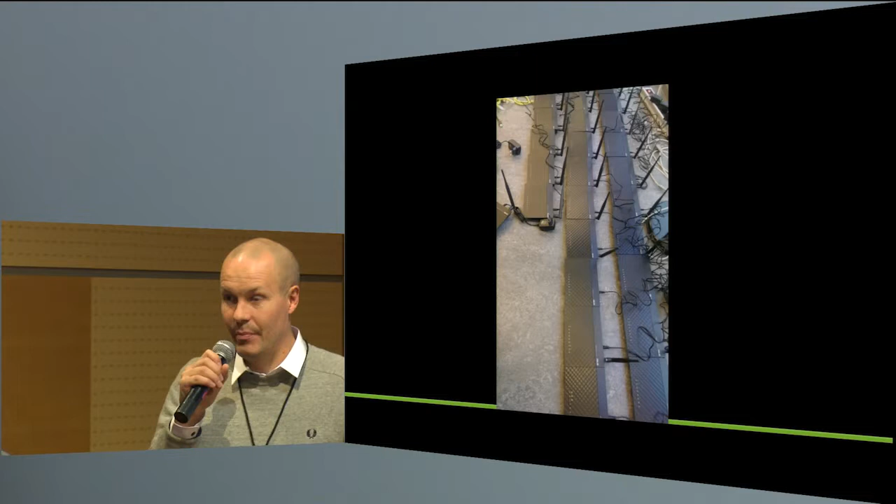The first problem is this. This is the most obvious one, and our planner is also at times guilty of this: AP overpopulation, right? Which leads to this. So even the best of planners tend to cause a lot of CCI by overpopulating the environment.

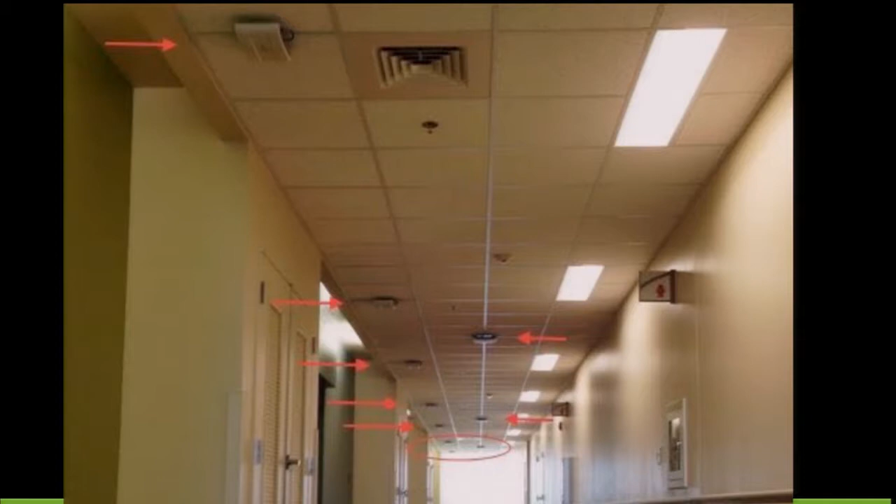And then there's another problem, right? Hallway Wi-Fi. So the planner doesn't understand where the hallways are, so it just places APs there. For some reason, they try to prefer the hallways quite often, which leads into enormous CCI.

And then this is very much a manual effort: disabling 2.4 radios. Certainly, I don't know of any auto planner that would do this today. And then they don't do really dual 5 gigahertz either. We support manually adjusting for dual 5 in ESS, and we support manually disabling the 2.4 radios, but the auto planner doesn't do that.

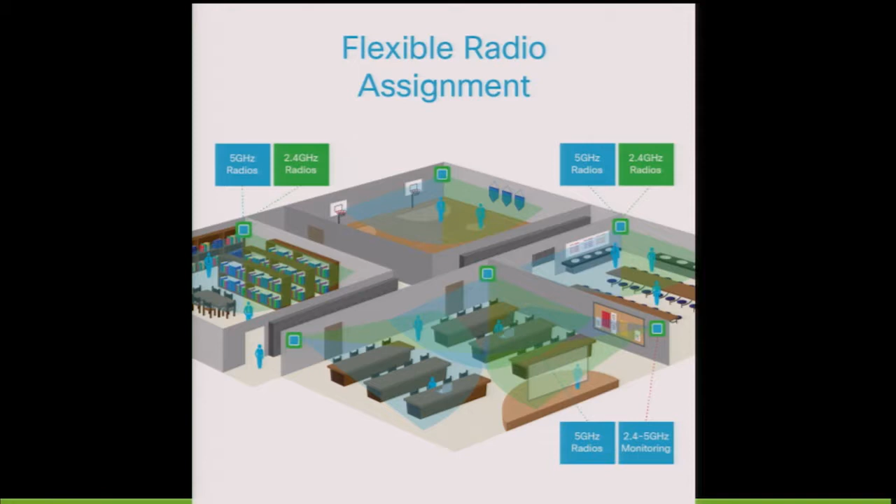So, this is probably the biggest problem with our current planner. It doesn't distinguish high density areas versus lower density areas. You can put in the amount of required capacity, but it just goes throughout the building. There's only one set of devices that you can put in per project, and it divides them evenly across the floors and across the areas.

So to summarize, that's that. Also, there's work to do on the ease of use of the planners as well. So what are we doing about it?

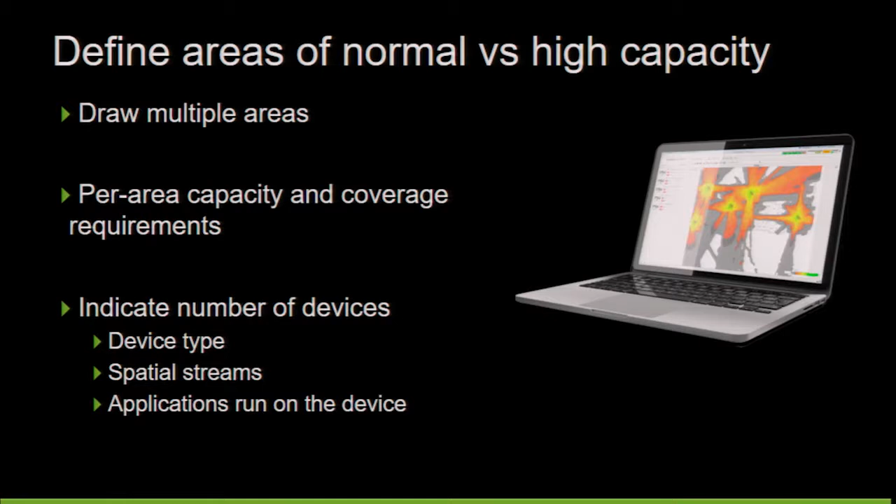In ESS 9, we will give you the ability to define high capacity areas, and this is pretty straightforward. You draw different areas, put in how many devices, put in also the coverage requirement like voice or data or whatever. And of course you can go deeper into indicating device types and applications run on the devices and spatial streams and stuff.

We also completely rewrote the AP placement algorithm. Most importantly, it avoids AP overpopulation. So if there's no spectrum reuse available, if spectrum reuse is just not there, it doesn't try to solve the problem by adding more and more APs.

That's probably, and thank you Keith, much appreciated. That's probably the biggest problem with the current planner, is just not understanding when to stop. It's the same problem as the sales guy has, right? And once Ekahau is bought by Cisco, then we'll bring back the feature of overpopulation. No, I'm kidding.

Also, we wanted to make the auto planner smarter. So it now avoids hallway Wi-Fi automatically. It tries to understand where the hallways are, using technology similar to what the wall outlining wizard does for wall simplification, but in a different way. It tries to identify where the hallways are, where the small rooms like restrooms are, where the elevator shafts are, and then it tries to avoid those locations the best it can. Sometimes it's just not feasible, but most of the time it does that.

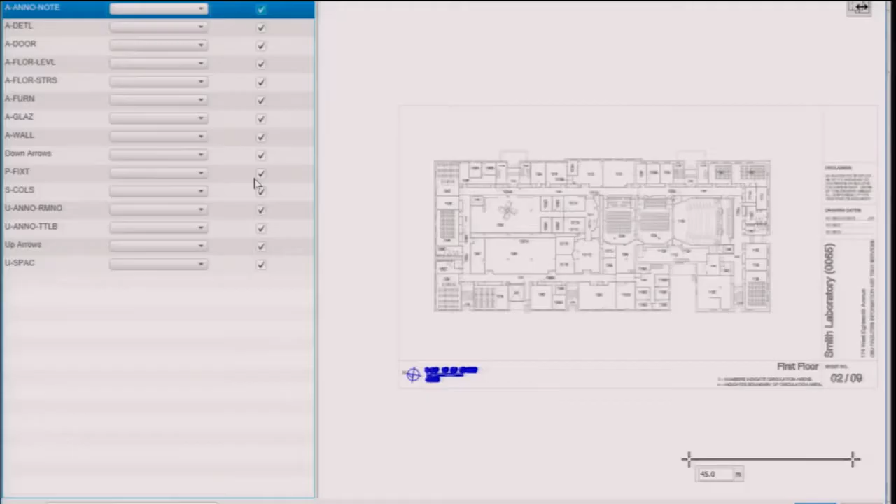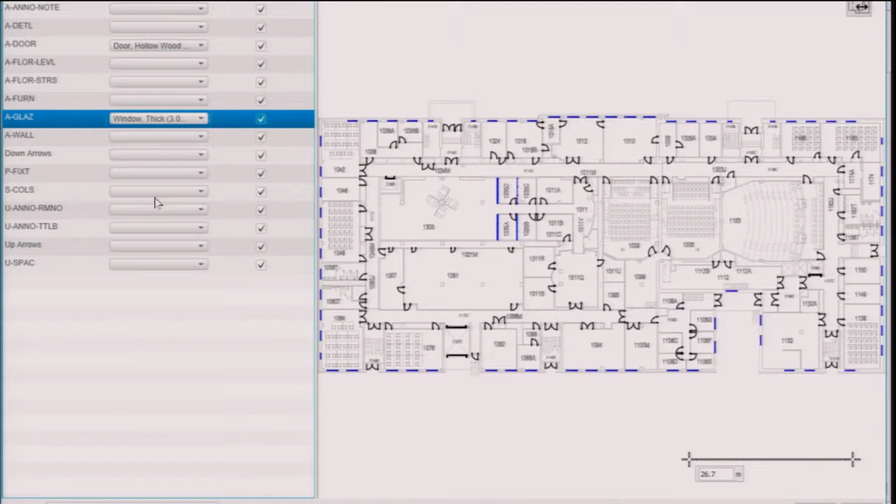So what we're going to do is a quick network plan. Just import a random university floor plan found off of the internet. And then what Mikko did was use the DWG layer selector to automatically take a cleaner layout of the drawing. Now select some of the wall materials - this is probably familiar to most of you. And then just bring it in.

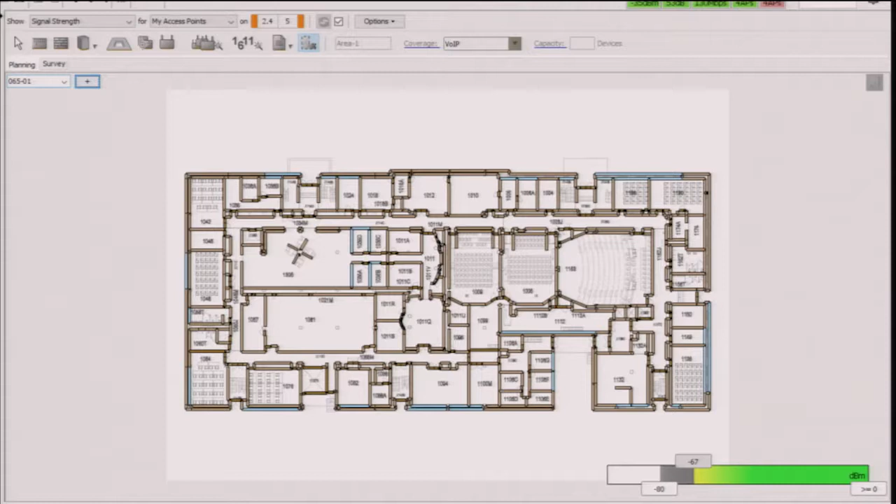So before we only had one area to define. We only kind of - let's look at that. If you hide the walls and let's do a plan first for the entire floor - this is kind of what happened before.

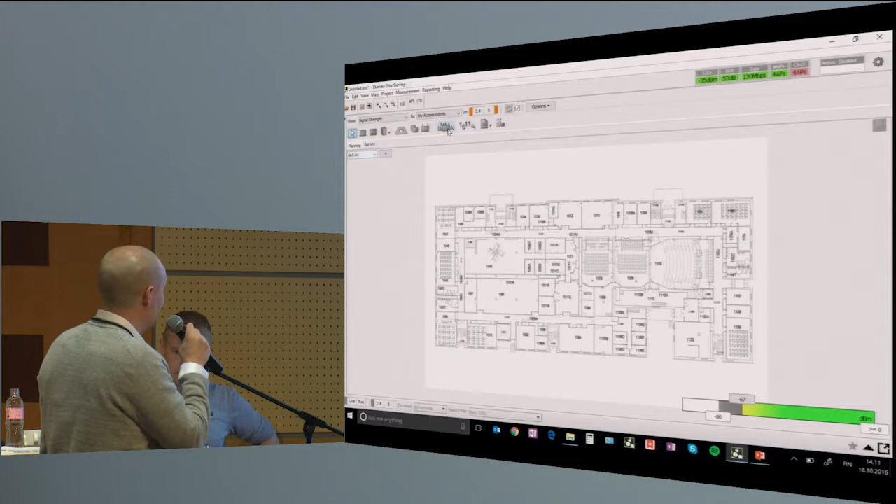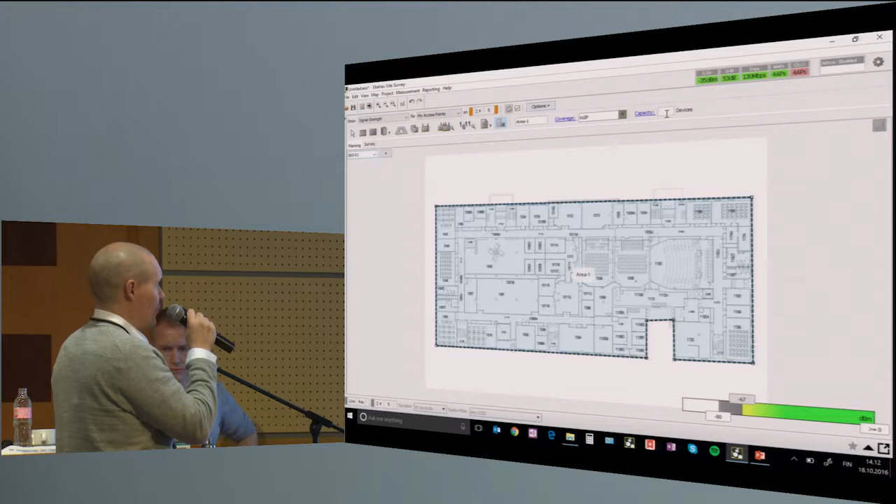So just indicate the desired area of coverage. And you can already see next to the toolbar there are a few selectors like the area name, what kind of coverage for this area, and what kind of capacity. So let's do VoIP and let's say a few hundred devices - put in 500 so that we get some actual...

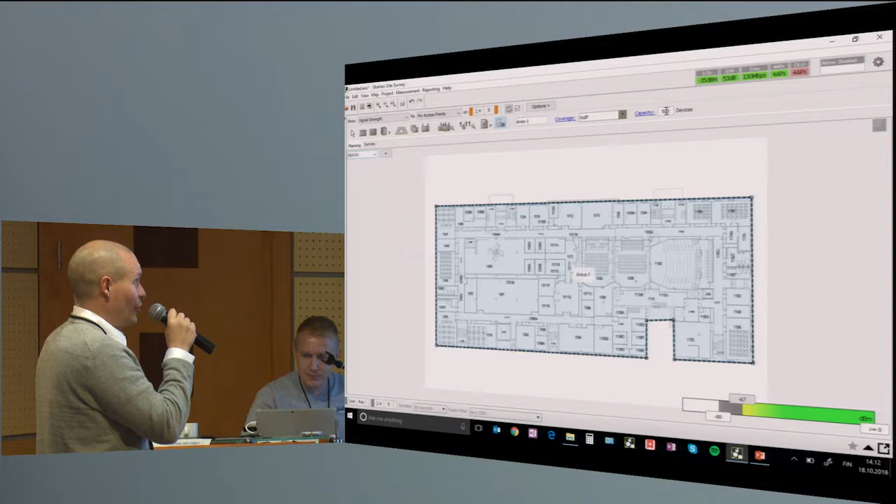We can do that as well. I don't think it will overpopulate. So now, previous version, we probably could start overpopulating this based on the capacity demand. But let's see what happens here.

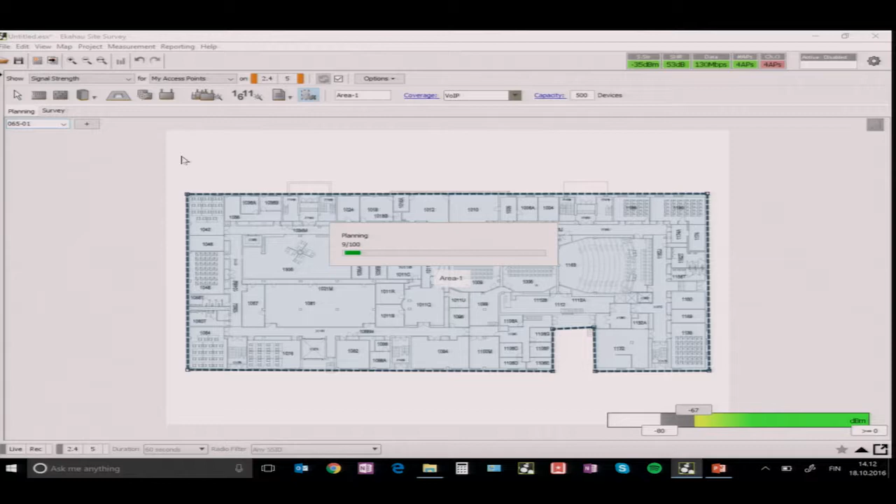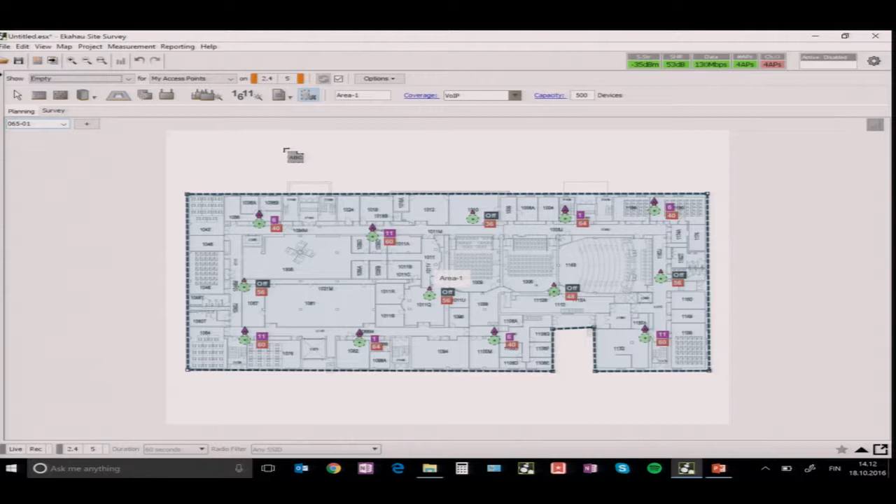So we'll do Cisco AP 3800s operating on dual band mode, 2.4 and 5. And we did optimization for 5 gig, and we had a decent capacity. As you can see, the auto planner automatically disabled 4 of the 2.4 gig radios. Don't look at the channel numbers, the channel planner isn't completely finished, so it didn't make it to this build. Actually, it disabled 5 of the radios.

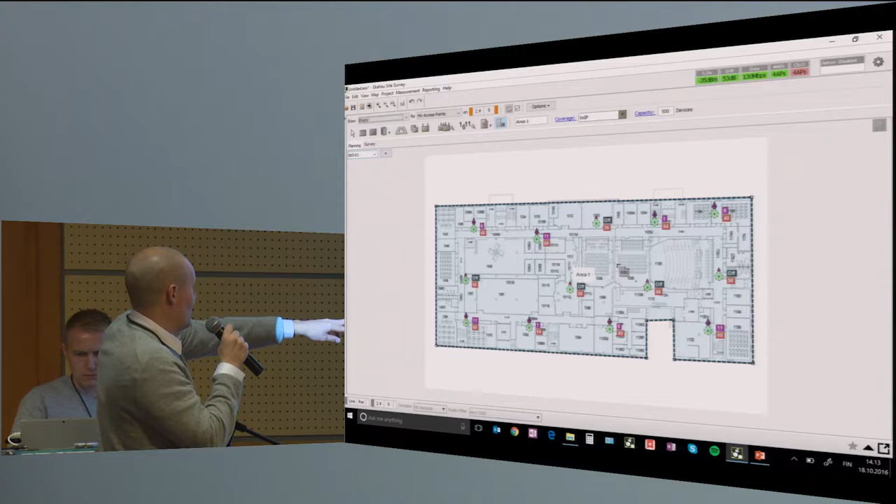So how many APs do we have? 3, 6, 9 - we have 13 APs, and out of those, 5 were disabled automatically. I think the plan makes pretty good sense. It put maybe 2 APs on the hallways, but that's fine because the other APs are not on the hallways.

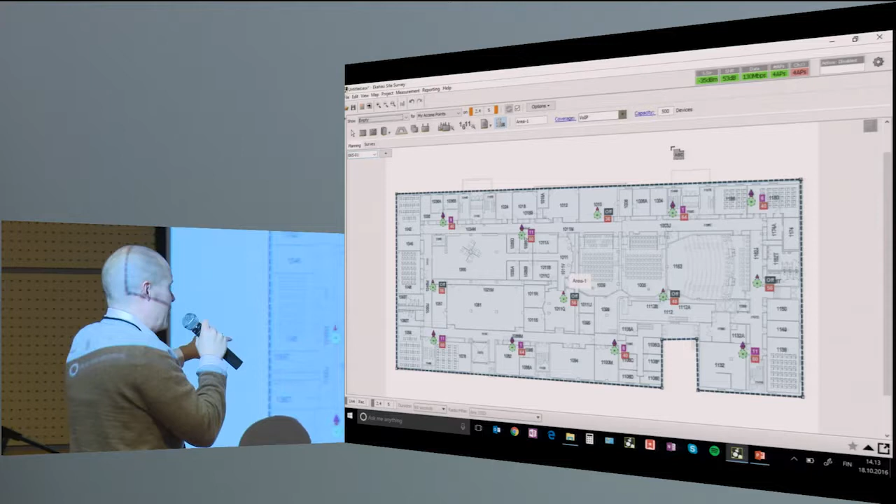And a new thing about the auto planner is also if there's areas that you need to cover with signal, it doesn't mean that the planner will still place APs in those areas necessarily if there's bleed through from another area. So it absolutely tries to always minimize the number of required APs and prefer not to overpopulate. That's kind of the plan with the 9.0 when it comes to a decent amount of capacity and VoIP coverage.

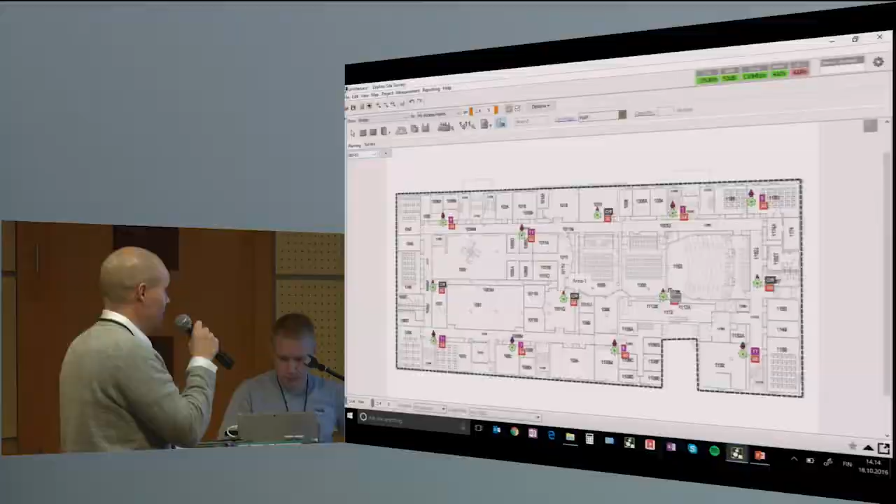So let's put in a few high capacity areas. You use the same tool for both, defining the first coverage area and then providing additional coverage areas. Now bear in mind that this area here - sorry, I'm walking in front of the screen, I shouldn't do that.

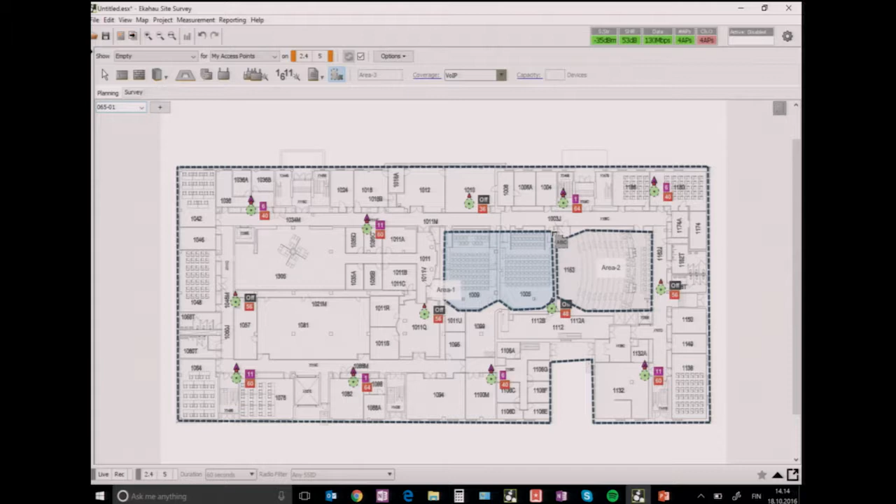So now that we're marking these areas with capacity, these will be the higher density areas with a few hundred clients each. Then the rest of the area will be serving those initially put in 500 clients. So we're moving those 500 clients to be only in the background area, so to speak. And these guys will then have, let's say, 300 clients each.

All right, one more. And you're going to put basic connectivity there. So we have 2 high capacity areas, 1 basic connectivity area.

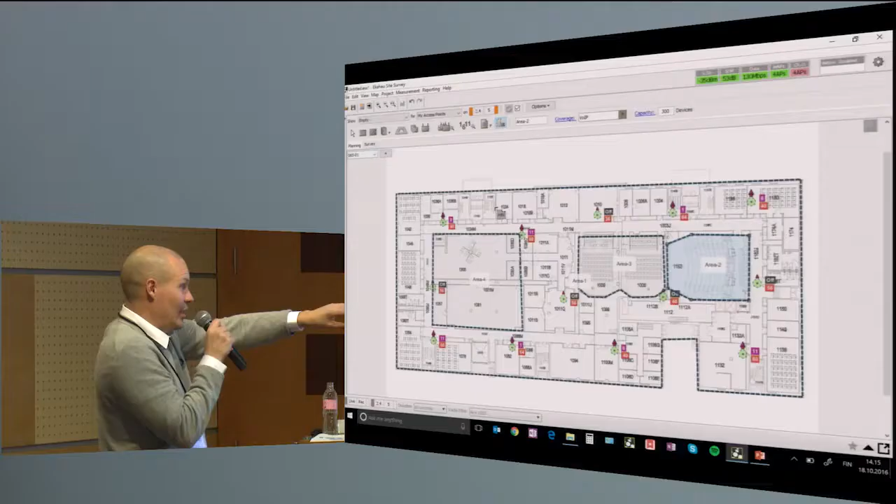How much do we have on that? So 300, 300 - on the 2 right-hand side areas, we have 300 clients each. On the background, we have five hundred, and then we have a basic connectivity area in the middle that doesn't have any capacity requirements.

So we'll recalculate.

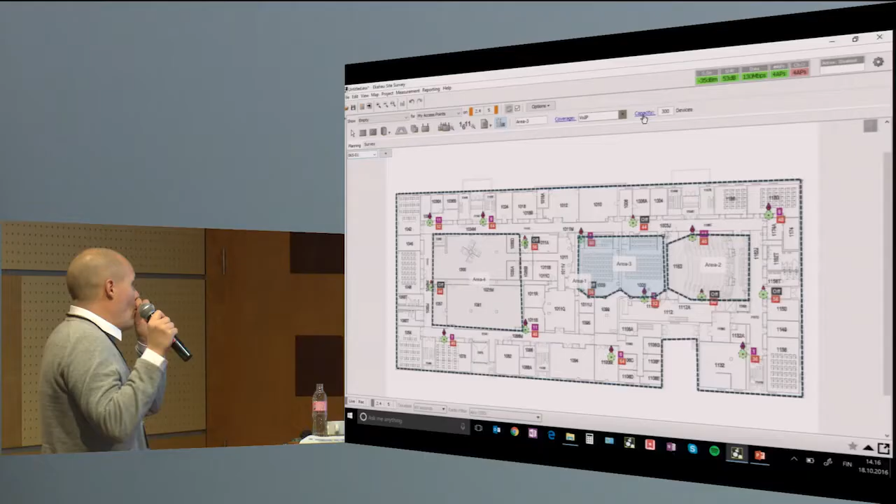Yep. Oh, sorry - is there something in the algorithm that keeps them near the edges rather than in the middle of those high capacity areas? Both of the high capacities look like it's leaning to the outside.

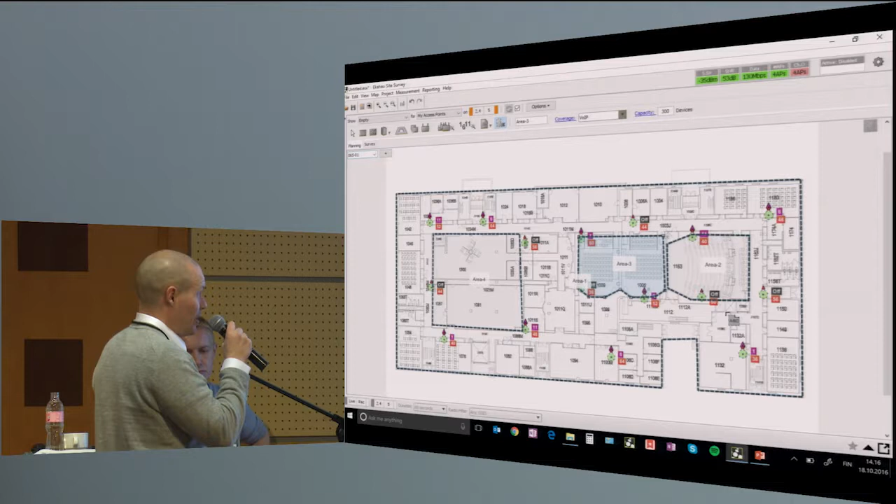I think they're probably - I've seen the same, and we see the same here as well. I think the answer is yes, so that it benefits both areas. It benefits the conference room as well as the other areas. But I'll need to ask for more details.

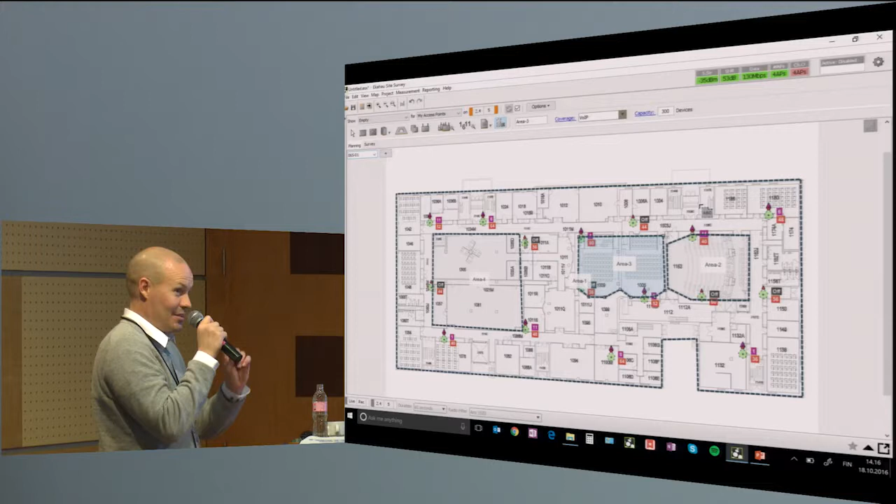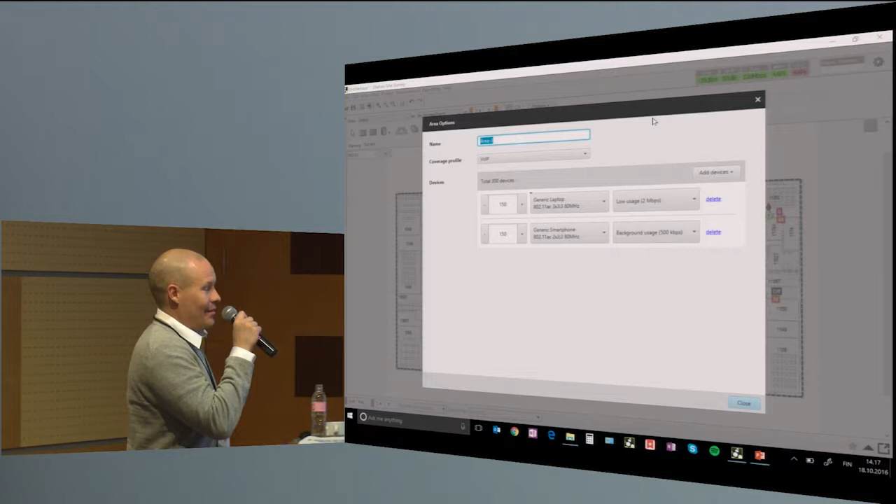Sure, let's look at the more detailed capacity settings, because this has also changed. So we tried to streamline it, and you remember how we put in the number of client devices in the main window. The default distribution is 50% laptops, 50% smartphones, because we thought we need to come up with the most usual use case. And that's kind of what we came out with.

So 50% laptops, 50% smartphones, and then of course you can start adjusting from here. So if you want to switch the megabits per second per client, you want to change the client type, you want to change the number of clients. And once you do that, then you have full customizability, but then you will lose the ability to put it in the main UI.

Sure, we can go into detail with the applications these devices are using and so on. The list is not ready, as you can see, but we're working on that.

These ones with the integrated antennas, correct. But of course you can use, just like before, any external ones as well.

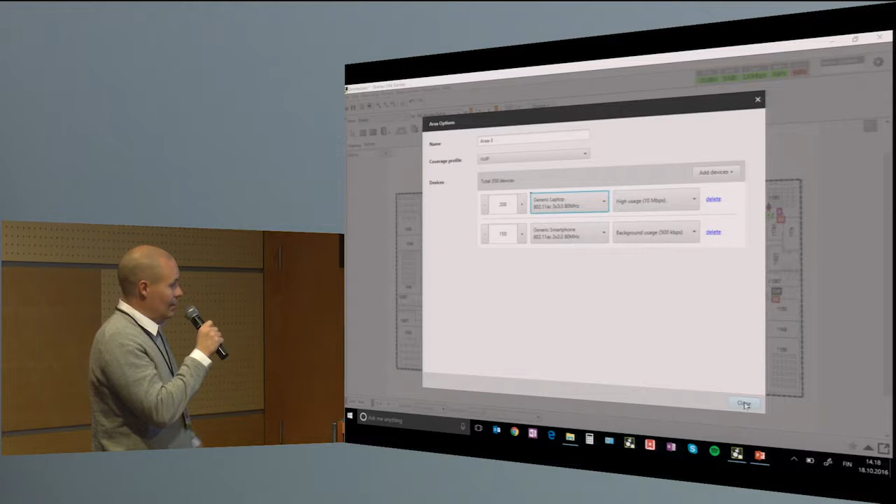Also, can you bring back the presentation? What we're hoping is the new auto planner gives you a better starting point to start working with and to start fine-tuning the network. That's kind of the hope.

Next slide, please. So also in 9.0 we are getting Mac out of beta as well. Right now it's in beta for a good reason, for site survey. It's not the ideal machine.

We're also working on, among other things, there will be a lot of stuff at 9.0 or before, but copy-paste is one of the key things. We understand that manual network designers and network design in general requires that. But that's the update on where we are currently with some of the features in 9.0.

Now would be a good time for questions. Scott. Yeah, channel overlap.

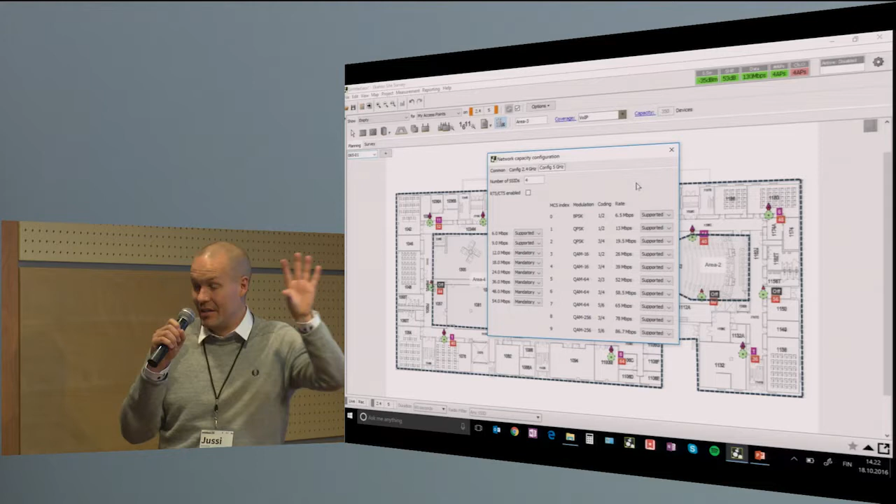And the first question was, will these different requirements, since we now have different requirements in different locations, be reflected in network health visualization and capacity health? And the answer is absolutely yes. We may need to come up already in 9.0 with 1 or 2 additional capacity-related visualizations because of this new way to show it. So yeah, we'll revise some of that.

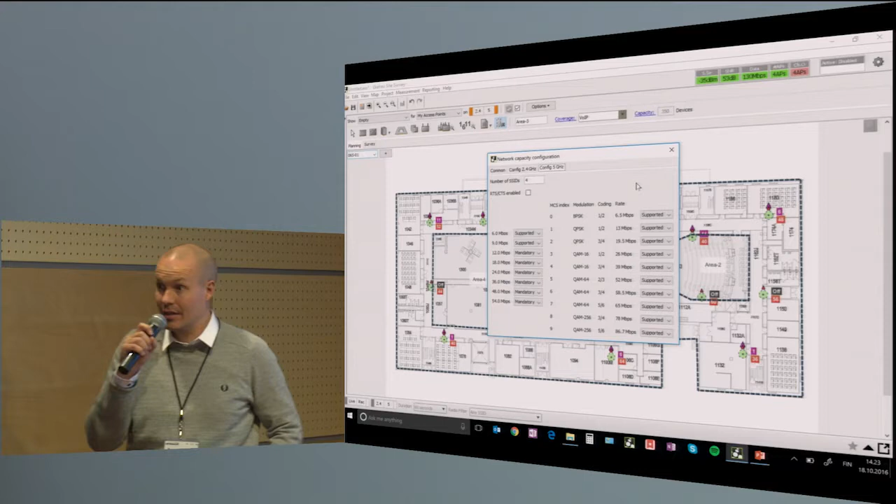Other questions? Maybe this is already a feature, but I'm just curious, can you do simulation of the received sensitivity of the access points? If you adjust that to simulate the settings, what will happen? No, you cannot simulate that. Yet.

Our research guy has implemented that, but just for background calculations. We are not sure how we're going to productize that in the end.